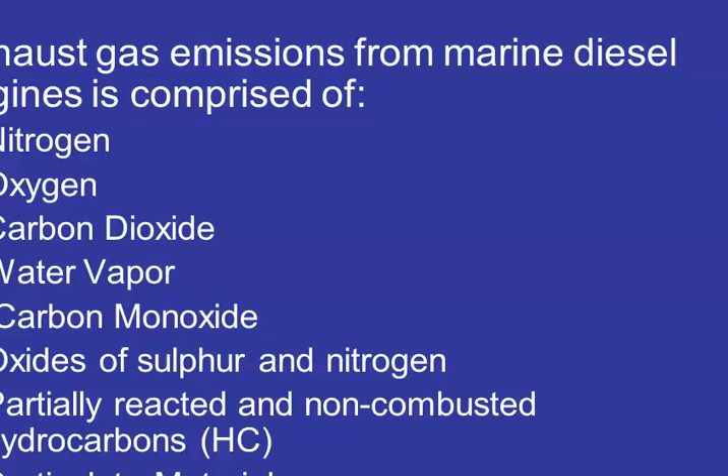Now, on this, it's just looking at the amount of CO2, the amount of NOx, SOx, sulfur oxides, and your total emissions. One thing I'll say is that with heavy fuel oil, heavy residual fuels have a very complex hydrocarbon chain that is hard to break down. With residual fuels, you will have a lot more particulates, even with the best running engine.

All right? You're going to have to clean your turbos once a day. You're going to have a lot more problems as far as plugging up of the exhaust valves and your waste heat boiler. Right? There's a lot more particulates involved in that fuel. You can go to a certain extent with the engines themselves by modifying the combustion process. But in the end, a lot of reducing the pollution from these engines does come down to burning a clean fuel.

Including, which we're just starting to see now in the United States. There's 18 ships on order in the United States. And there's at least 6 to 8 of those, probably more, that are being built to run on dual fuels, which means gaseous and liquid fuels. And if you're talking of a gaseous fuel, what are you talking about? LNG. To get the compressed, liquefied natural gas if you want to get the volumes.

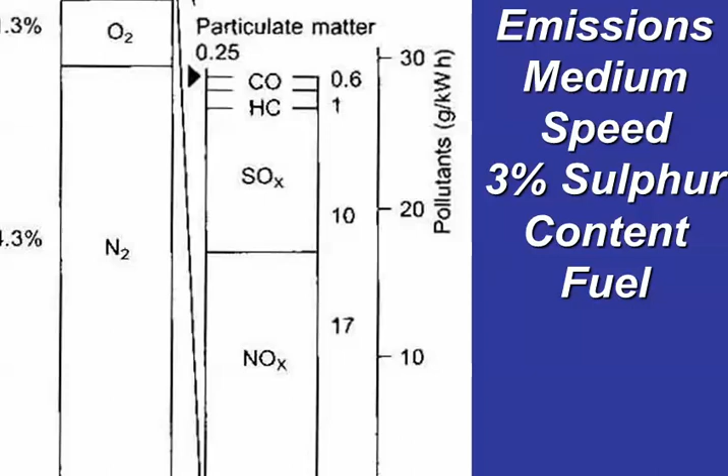So nitrogen oxides contribute to the formation of acid rain. This is the big one, smog formation. The other thing on this is don't think that smog produced out at sea doesn't affect inland, right? I forget what they said of the percentage of smog here in California now that actually comes from China. And that's the argument here. You know, and I think it is a fairly legitimate argument. Yes, you're burning that fuel out at sea, but that pollution that you're producing does not stay out at sea, right?

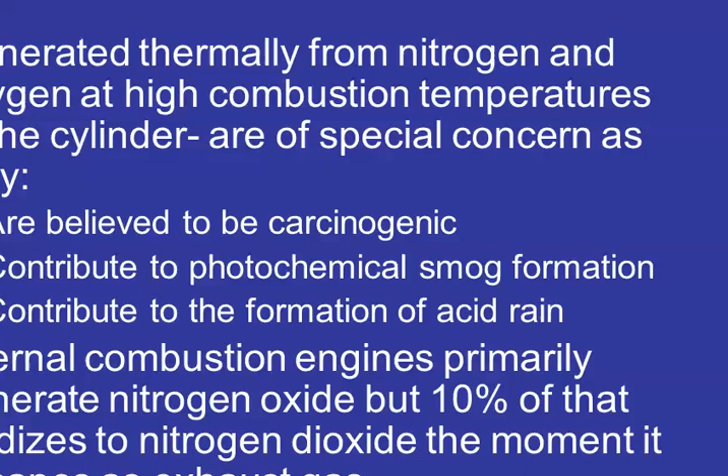But NOx is one of the big ones. And the sulfur oxides too from high sulfur fuels. So the sulfur oxide, unpleasant odor, irritates mucous membrane, major source of acid rain. Now I don't know too, there's been a lot of talk about acidification of our oceans at this point too. More of that they're worried about with, on the bottom of the ocean, there is a lot of CO2 and methane stored as a slush, frozen.

What they're really worried about is if you raise the temperature of the oceans a few degrees, and it doesn't take much, it's only a few degrees, some of that will start to gasify and bubble out of the oceans. It could dramatically change the planet. Okay? With that, with the CO2, carbonic acid, you could substantially change the pH of the ocean. Shellfish live in a very narrow range on the pH band. If we get out of that, they will not be able to develop a shell. And worldwide, we could lose all of our shellfish almost very quickly, which would have a dramatic effect on the food chain.

Now, with the acid that you're dropping out from the ships, how much that will affect that, I don't know. And I don't know if they've done a study on that. Okay? But again, that would be a contributing factor. On a ship, one of these large vessels running today, you're burning as much as 200 metric tons of fuel per day. Are you a major polluter? Yes. No question about that.

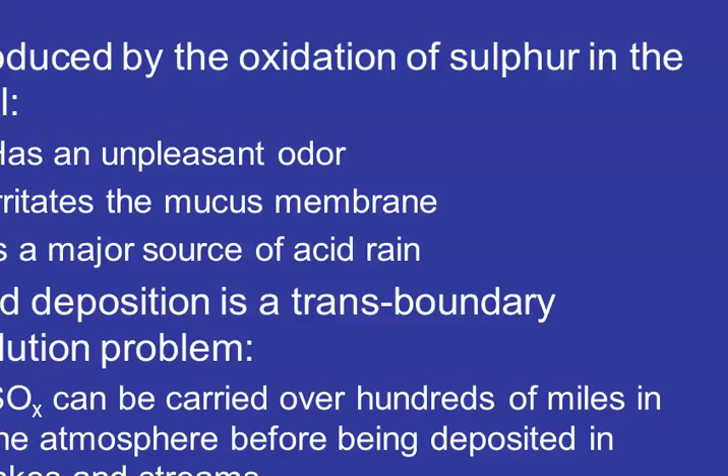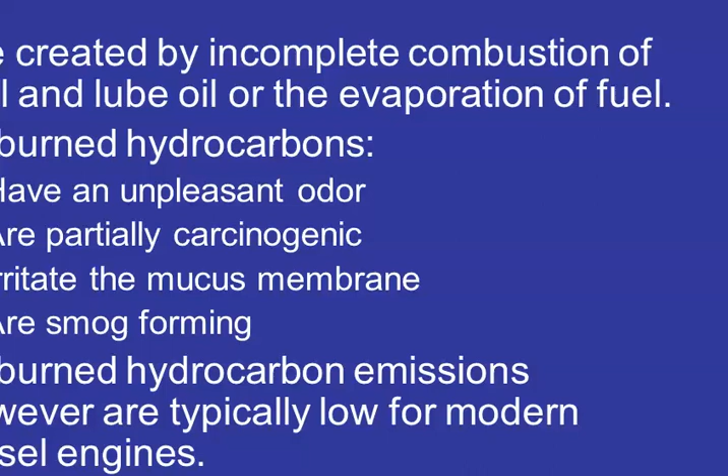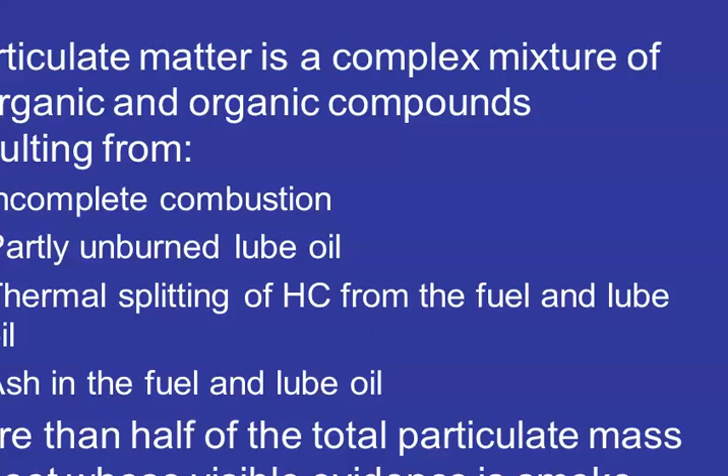So the unburned is more the visible, but in reality, I think somewhat lesser on the scale as being harmful, though it's very, very visible and it is carcinogenic. Carbon monoxide, CO2, again, you know, this is a contributor to the global warming and these other problems. Particulate matter comes from incomplete combustion, partly unburned lube oil, thermal splitting from the fuel and lube oil, ash in the fuel. And again, most of it's going to come up as, you'll see it as solid carbon.

Now, one of the things we're getting into, and Tier 1 is already passé. And by the way, this topic is a very, very good discussion in Pounder's. And again, I assigned that as reading, and I would read it. But you're going to Tier 1, Tier 2, and Tier 3, right? This is like the automotive industry where they're phasing in smog emissions over time, right?

Okay. In fact, we got new engines on our boats in the harbor through this. The state of California gave us grants to take out the old polluting engines and put in newer, I think they were Tier 2 or Tier 3. I think they were Tier 3 engines, to reduce the pollution.

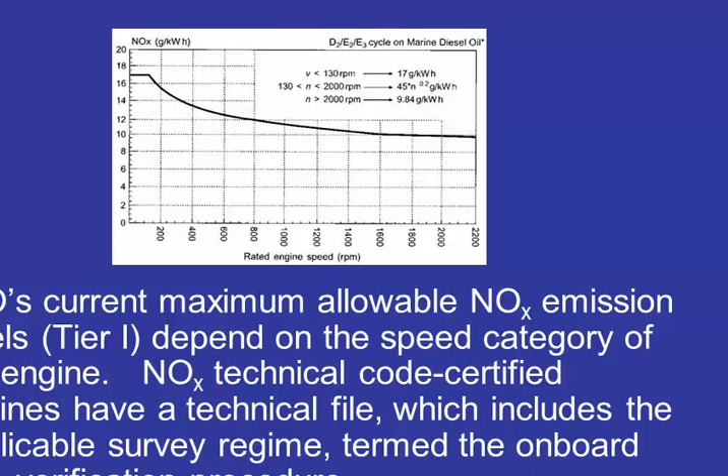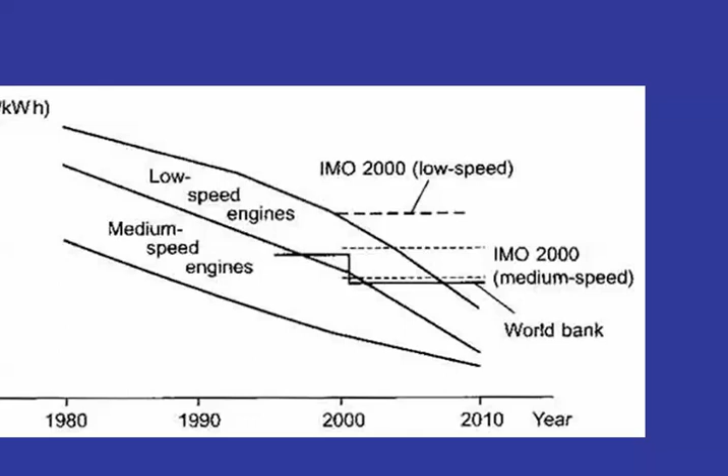So you notice 2010 is the end of this scale. But anyway, what we're trying to do is also reduce NOx.

Now, on this, where I want to, is this one, is the battery dead? Okay, I don't know, for some reason. So,

One thing on this is to substitute your fuel. And I think it is a good option to go to LNG, burn a clean fuel out at sea. I would make a definite argument that residual fuels should be burned shoreside in shoreside power plants because they're more readily able to deal with the problems of it, right? PG&E can, like with the sulfur, they do a scrubber. You can scrub the sulfur out, then I think you mix it with, if it's limestone, anyway, they put them out in leach fields, and the byproduct is gypsum. So they can treat that.

You can put in particulate filters, all of these things that would make your life a living hell on a ship, right? So we'll see what happens, but one of them is either to go to clean low sulfur distillates or LNG. Again, I kind of warned you about that. There's many people that get upset about this whole fuel changeover because it's outside the norm. Right? So you kind of want to listen.

But understand that when you're talking about these big ships out there, and look at how many ships are out there, again, burning 200 metric tons of fuel a day, they are a major polluter. There's no question about it. And switching over to clean fuels, would it have an effect? Yes, especially when you talk about somewhere like Los Angeles with a big port. Though I don't necessarily agree with shutting the ships down and switching over to shore power.

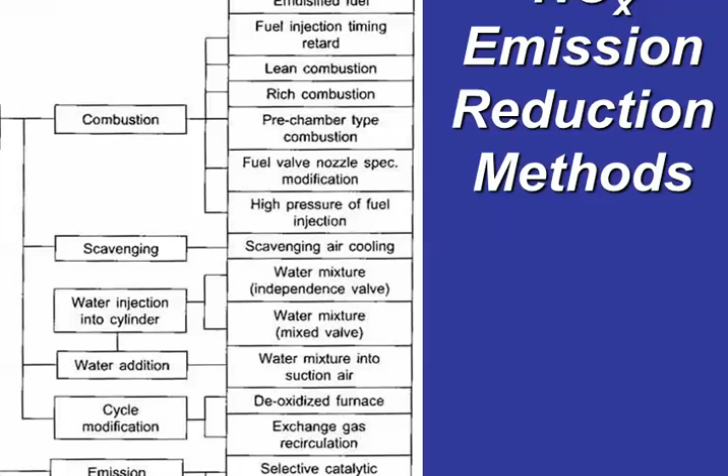Cycle modification is another one. In exhaust gas recirculation, just like your car has an EGR on it, you're going to see that on the ships too. And then post-treatment, SCRs. I think that's going to be real big. This shows you how much you can reduce it. And the SCR by far is the best. But I think you're going to see some combination.

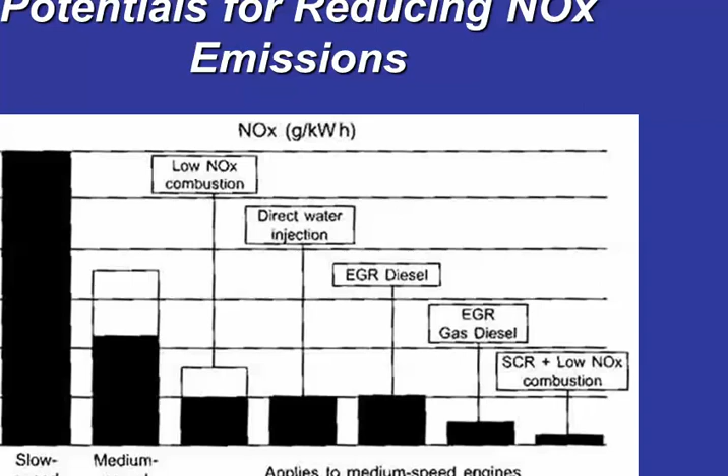One of the problems with the SCRs is that they only work when the engine's up at high loads. When you drop the load off, the temperature is not high enough, and it needs that temperature for the catalyst to work, right? So likely you might have one of these other types to reduce the NOx at low loads and an SCR for high loads. You also will always see the SCR before the turbos, which, since they do take some of the heat out, is going to affect your turbocharger output.

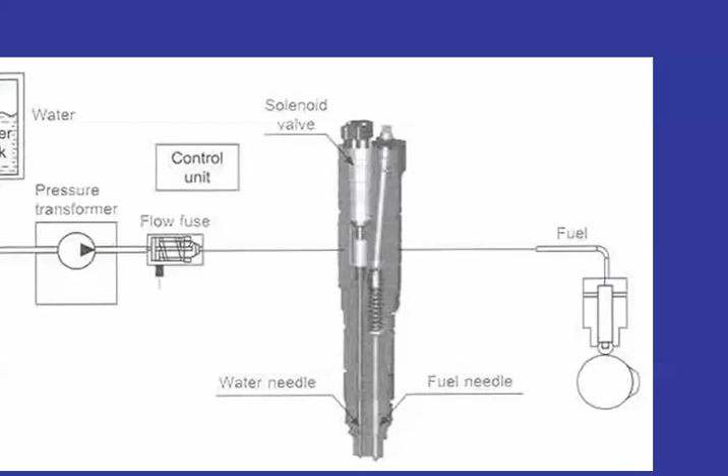With direct water injection, they actually have an injector. Sometimes it's combined in the same injector, sometimes it's a separate one. What it does is it injects water directly into the cylinder to lower the temperatures, and that will also lower the pressures.

I put this in just to show you that we have on the simulator, here's your freshwater emulsion control. And you can try it and play with it. I haven't played with it too much.

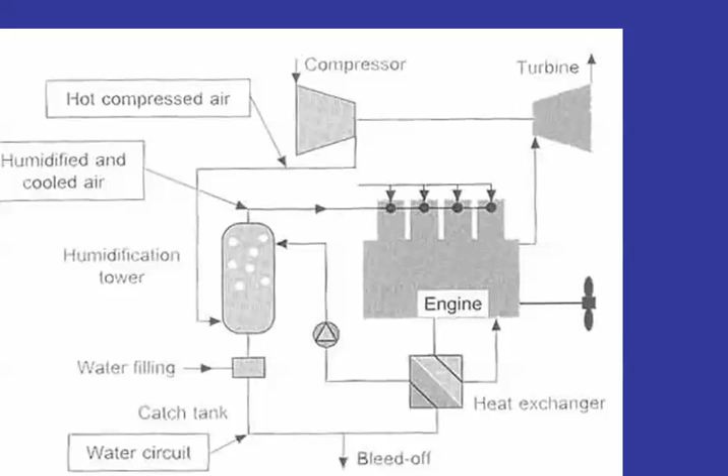And here's the humid air motor, where they'll take it and literally humidify the air. They've got a compressor, so you're taking hot compressed air and humidifying it and then injecting it into the intake, the scavenging air going into the engine. Again, doesn't make me warm and fuzzy with heavy residuals. It wouldn't bother me too much with a low sulfur.

Exhaust gas recirculation. The problem with exhaust gas recirculation is we have to put a scrubber in it, because if we're burning heavy residual fuels, you have a lot of particulates in there. You got to clean it up. So what you're doing is you're bringing in the exhaust gas, and you've got typically trays of rock or like ping pong balls and spray nozzles, right? And it's having to work its way up through that to clean it.

And then that cleaned exhaust is fed back into the scavenging air system. And you're feeding that back. And that's been used for a long time with automobiles. Exhaust gas recirculation has been around since at least the 70s or 80s.

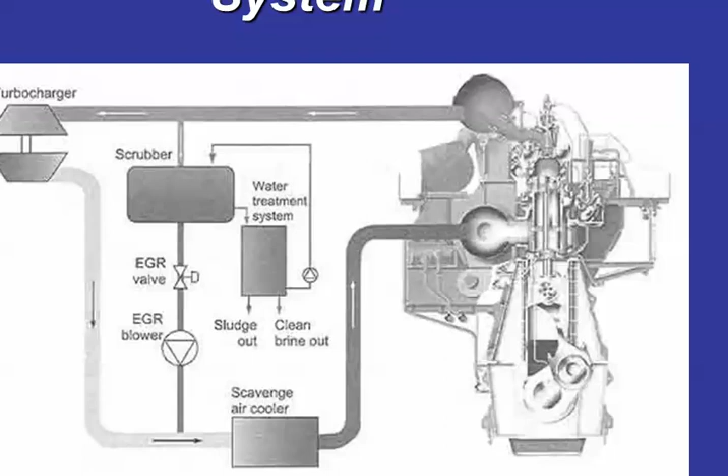Okay. One of the problems of doing this, though, with high sulfur fuels is now you're going to be dumping a lot of sulfuric acid directly into the ocean unless you treat it. And if you treat it and neutralize it with a base, now you've got a toxic sludge that you have to discharge from the ship.

So SCRs, and in lesson 6 we'll get into the SCR. You've got a good depiction of an SCR on the simulator. If you want to put it in common terms, you've got a catalytic converter, right? It's a catalyst. And it is in the exhaust stream. You bring it up to temperature. The exhaust gas goes through it, and it looks like a honeycomb. They have a definite life.

It's something like about 30,000 hours, but they have a definite life, which is shortened, by the way, if you plug them up with a lot of particulates. They're not acceptable, really, for heavy fuel oil. I don't really think you're going to see them on heavy. You'll have to be burning clean distillates. They just plug up too fast.

And you inject ammonia. It's usually called urea. Urea is a dilute form of ammonia, and it may come basically from, I don't know if that's true or not, you'd have to look it up, whether it's the same concentration as urine. I don't know. But it usually comes in a powdered form, which is much easier for you to deal with shipboard. Right? You take that powdered form and you mix it into water, and then that is sprayed.

And ammonia is made up of nitrogen and hydrogen, right? As that ammonia goes into the catalytic converter, under heat and the catalyst, it breaks the nitrogen away from both the nitrogen oxide and away from the ammonia molecule, breaks it up. The nitrogen is pure output, the oxygen and the hydrogen combine, and you have water. Nitrogen and water output. And you can take the NOx down to whatever levels are mandated by law by injecting more of this ammonia.

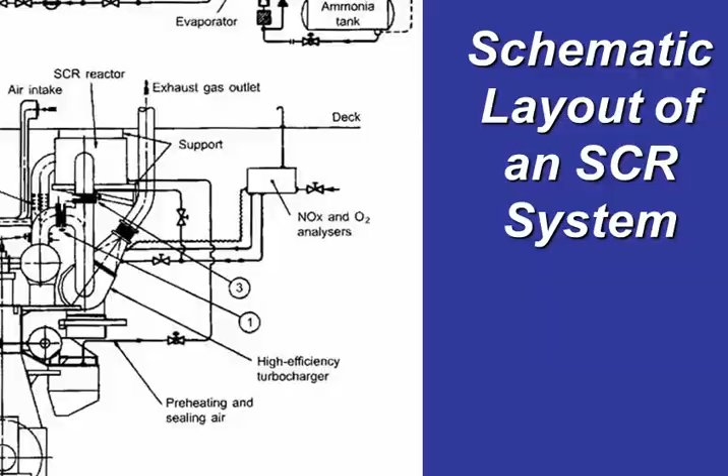We'll see what happens. It's all going to be dictated by law. But again, the problem with it: they're coming into California 200 miles out, and then they're putting the SCR on probably right before they pick up the technicians, and they're burning clean distillates when you're doing it. In fact, in lesson 6, I kind of have you do it while you're changing over. In real life, you'd probably wait till you're fully changed over before you went over to the SCR. You'll just plug it up with all the soot from heavy.

So a lot of the SCR is fuel dependent, and if we're running heavy, you're not going to use the SCR. The weird part about all of this is, and it's actually okay with the California Air Resources Board, there is a loophole in the ECA, Emission Control Area legislation worldwide, that states if you put a scrubber in and scrub the acid out, then it's okay because your air pollution is not bad. What's the problem with that? You're making acid rain directly.

And they don't necessarily say in the legislation that you have to treat it. The Europeans have been the ones proposing that you neutralize it with a base. A lot of other countries I've seen have just said, well, we'll just dump it in the ocean directly. Some of this really does need to be well thought out, because it's not my generation that's going to be affected by this. It's going to be your generation. But if we crash the food chain to get our Nikes 5 cents cheaper, does that make sense?